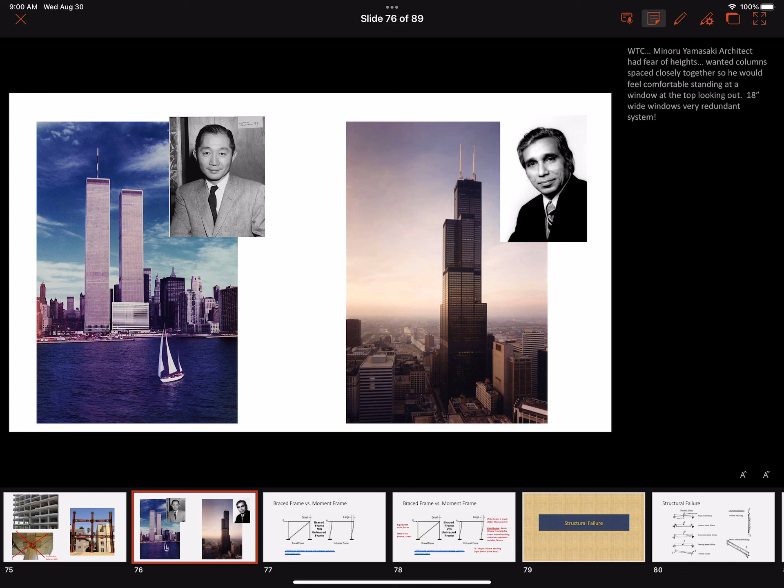Last time we left off with the different types of lateral force resisting systems. Can anyone remember what those three types are? Braced frame, yes. Shear wall, yes. Moment resisting frame, excellent. Almost every semester I've taught this class, that has been a question on the first exam: what are the three types of lateral force resisting systems? We got braced frame, shear wall, and moment resisting frames.

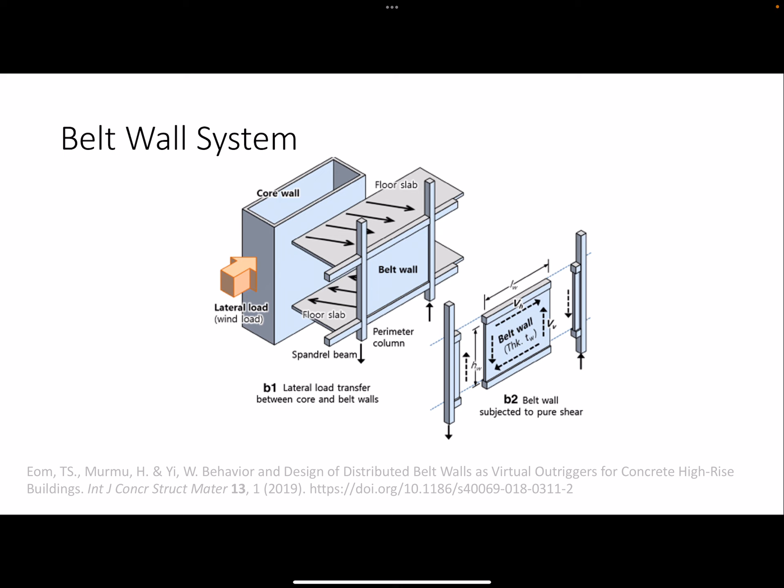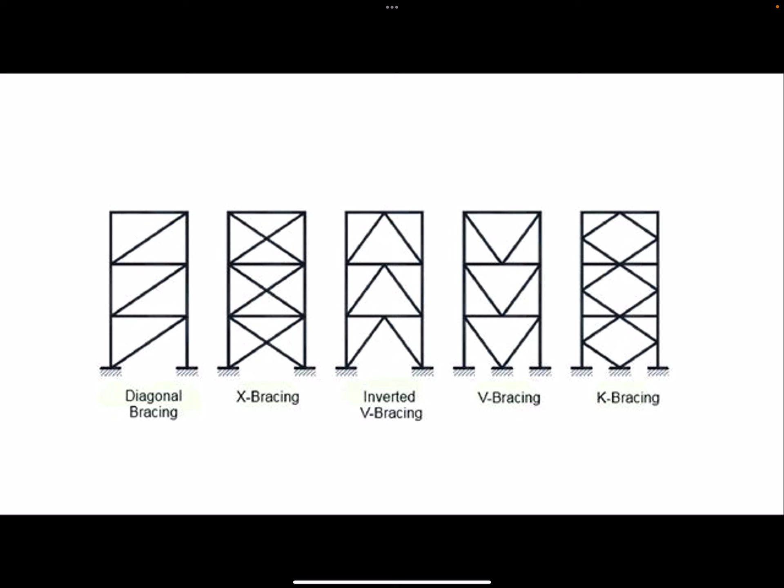So just as a quick recap, going through here: shear walls have the solid panel, right? Braced frames, you can have one or two diagonals there, different configurations for a braced frame. Shear walls have solid panels. They can be made of any material that can resist shear, right?

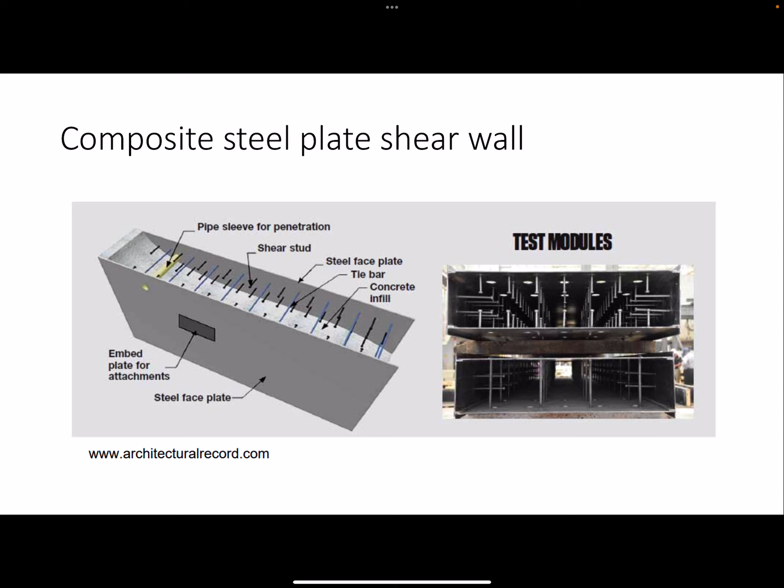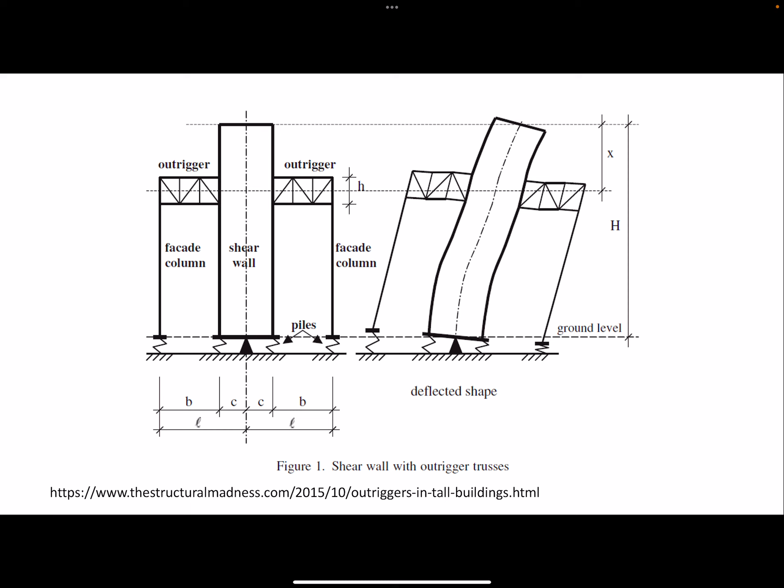In high rises, sometimes you need to include outriggers with that shear wall. That doesn't make it a different lateral system from those three types. It's still a type of shear wall system, all right? But that just makes it possible for a high-rise structure.

And then for moment-resisting frames, there are a few different configurations that you can have, but usually they involve this type of rigid joint. We'll talk more about that later on. We looked at pinned joint behavior as well. So that's another important concept: what is the difference between a rigid joint and a pinned joint? How do they behave differently? What are the different assumptions associated with those joint connections?

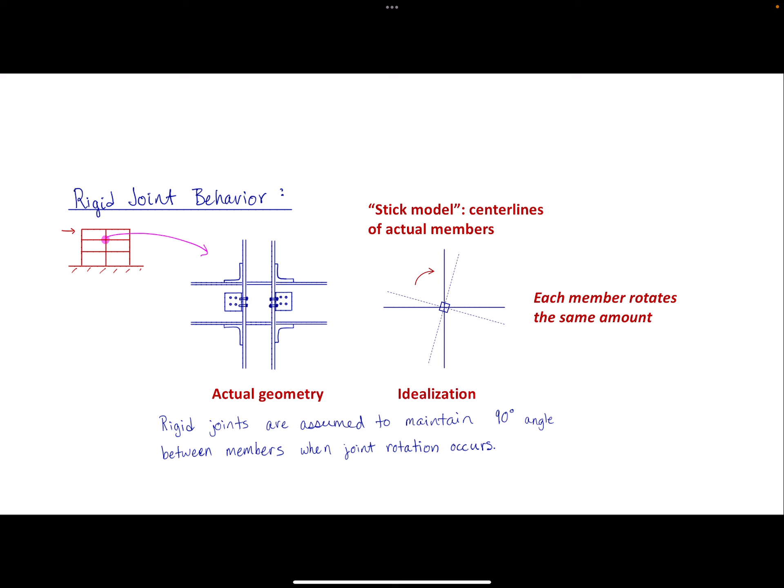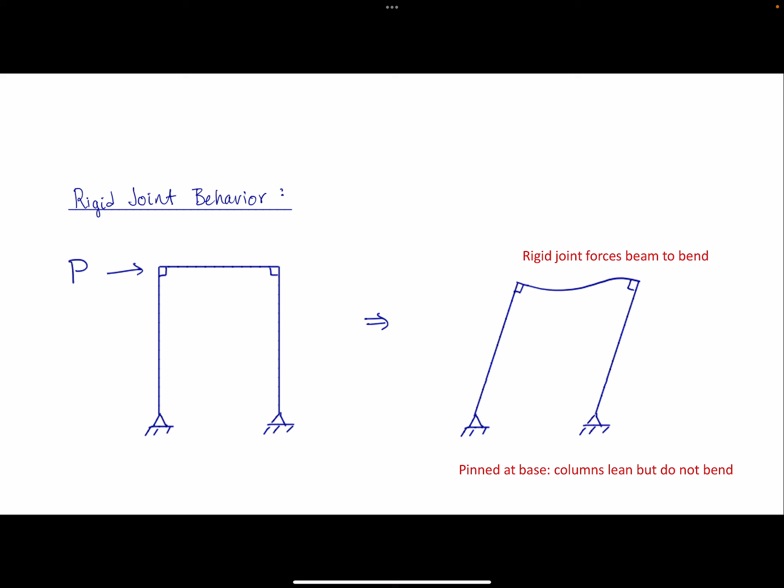Remember with a rigid joint, you maintain a 90-degree angle between beams and columns. So when that joint rotates, every beam and every column that frames into it has to rotate by the same amount and in the same direction. If you have a pinned joint, then the beam can rotate separately from the column, or you don't have to maintain that 90-degree angle.

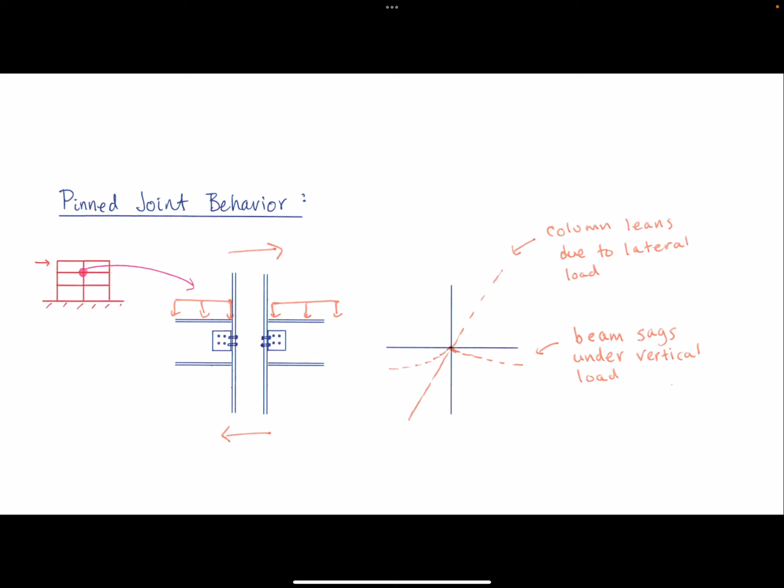The World Trade Center towers consist of very closely spaced beams and columns. The spandrel beams are pretty deep. The columns are very closely spaced together, just about 2 feet apart roughly. The reason for that is because the architect, Minoru Yamasaki, who is an American of Japanese descent, was actually afraid of heights. So he wanted anyone to be able to feel comfortable standing at the perimeter of the building towards the top, looking down out the window. And in order to do that, that's why the columns were so closely spaced together.

And that happens to also be one of the reasons the buildings were able to stand for as long as they did after they were impacted by those airplanes, because that made for a pretty redundant outside system. So this is a tube system that consisted of interior column and core around the elevator shaft, and then all those perimeter columns resist that lateral load through moment frame behavior, which is a lot of shear and flexure.

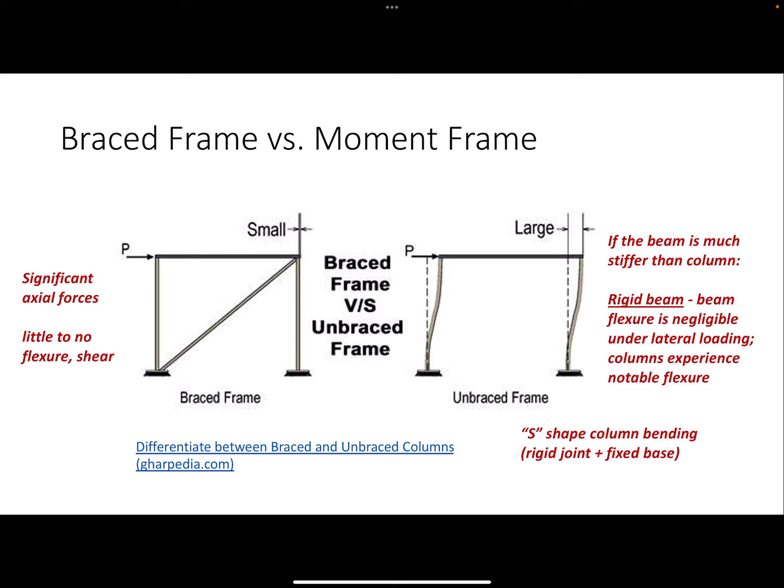All right, so now to wrap up this set of lecture notes, before we roll into the gravity load path discussion, we'll look at some potential structural failures.

Horizontal shear failure occurs, this is mainly a concern for components or beams that are assembled in layers. For example, glue laminated wood beams are often constructed in layers, and so if that bond between the layers, the glue, isn't strong enough to resist the horizontal shear in that beam, then it will fail and those layers can just slip and slide right past each other. So we want to avoid that, of course.

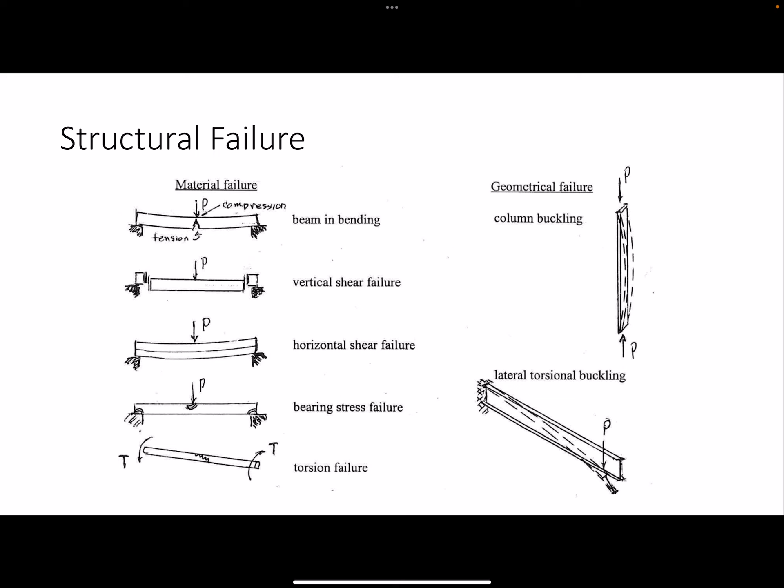So then on the right side we have geometric failure, different types. First you've got column buckling, which is a concern anytime you have a column in compression, especially if it's a slender column. And you have lateral torsional buckling, which is an issue with beams that span long lengths, particularly if it's a cantilever beam as shown here. It represents a kind of twisting and bending out of plane. To avoid those failures, a simple fix is to provide lateral bracing at midpoints or endpoints wherever it's crucial.

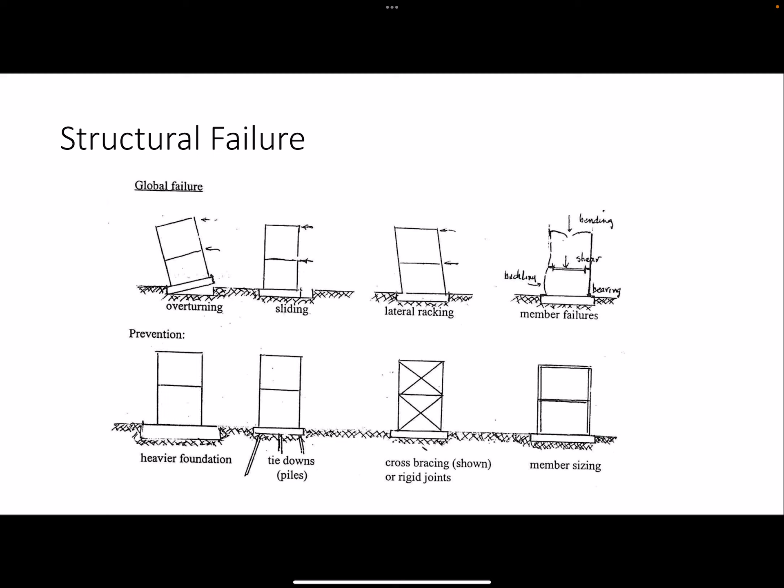And even with rigid joints, you'll still have some racking there, so that's just something to keep in mind. But the more you stiffen up those joints, the less that racking will occur. And then lastly, you have all those different types of member failures that we talked about on the previous slide. The solution to that is to really make sure your members are sized appropriately.

All right, questions?

If you have a lot of lateral racking, why wouldn't you just make it a braced frame? A lot of times that comes down to what the architect and the client want aesthetically, honestly. Because if they want a certain look, then braced frames don't fit it.

And we can make moment frames work—we have ways to deal with it. But it is just a different expectation that we have for the building. Good question. Any others? All right, so now, just for fun...

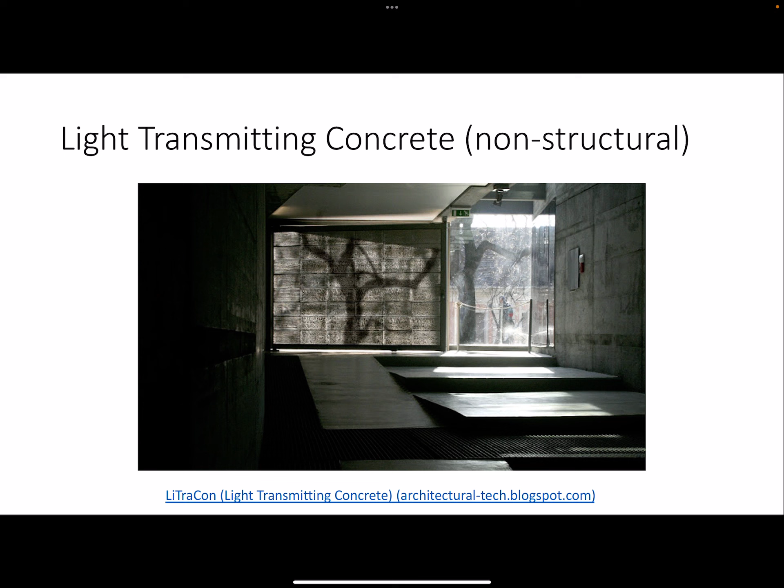But this is actually a pretty cool product. It's called light transmitting concrete. It is purely non-structural, so it's just for good looks or interesting architecture, and it can be used in non-structural purposes. So, all right.

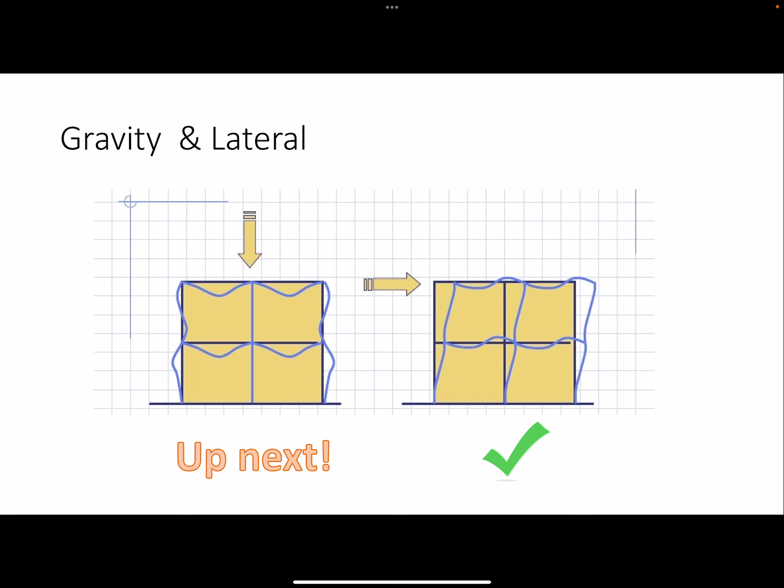So now I'm going to jump over to the gravity load path discussion. We just talked about lateral systems and lateral loads. Now we're going to talk about gravity loads.

Could also just be a flat plate. You don't necessarily need a whole network of beams. You might just need beams on the perimeter. It depends on the system. Whatever you have at that level transfers those forces to the vertical elements, being the columns and or walls, and then those transfer to the foundation.

So the floor system, when we say that, we're referring to whatever structural flat plate we may have, and then any beams that are in play. That also includes knowing where the support points are, which would of course be columns and walls, or maybe other beams, depending on what we're looking at.

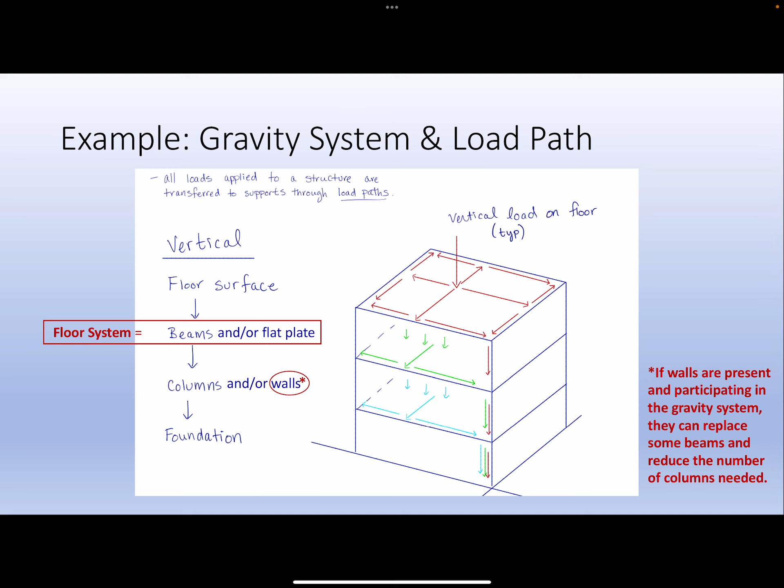Now, looking at those vertical elements, this note points out that if there are walls present in the gravity system and they're participating in that system, they can replace some beams and reduce the number of columns that are needed. So it just depends on how you want to use them, or if you want them at all.

All right, so now we're going to look at a couple different types of floor systems and go through some vocab. These floor systems are also included in the skeleton notes handout designated for Friday. We may touch on that a little today, but I'm not going to do much, if any, writing that goes on that. They are repeated on that set of lecture notes for your reference, so you can draw more on them if you want.

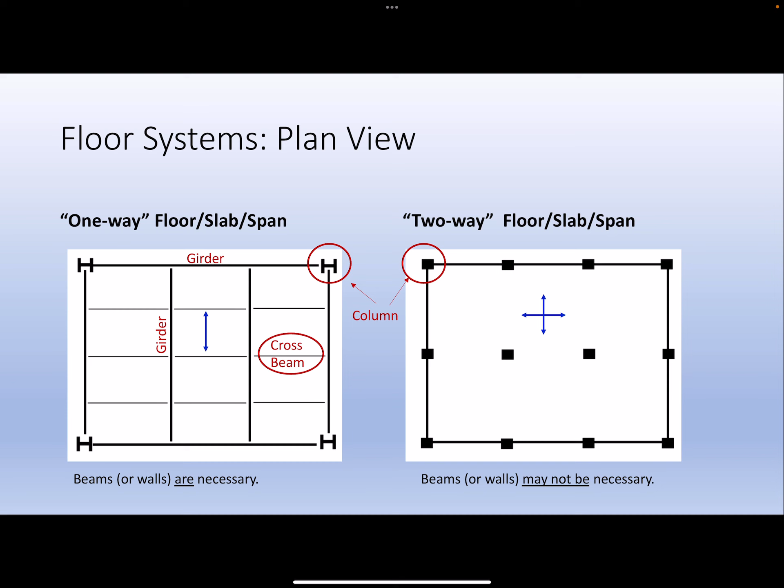So we're going to go into the definition of different beam terms. Girders are specifically beams that support other beams, right? We've got the same floor plan with different terminology highlighted. A primary beam is a beam that spans between columns. So the definition of girder is tied to what the girder supports. The definition of primary is tied to how that beam is supported.

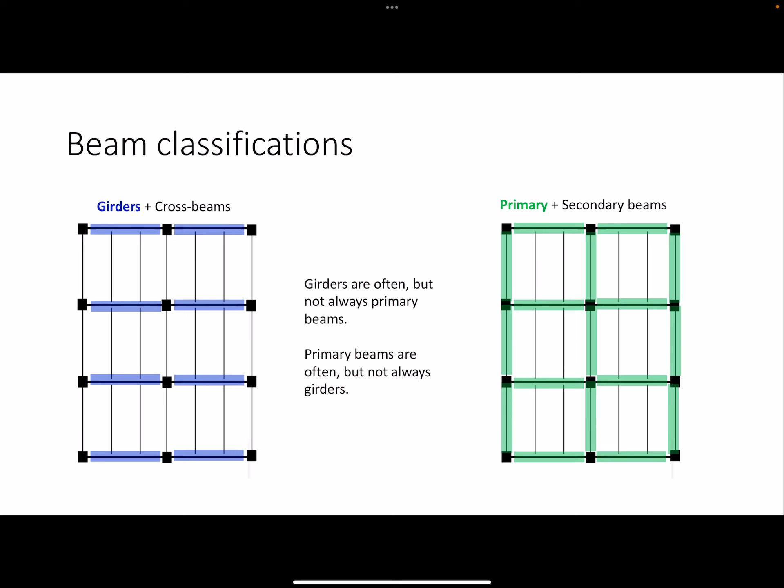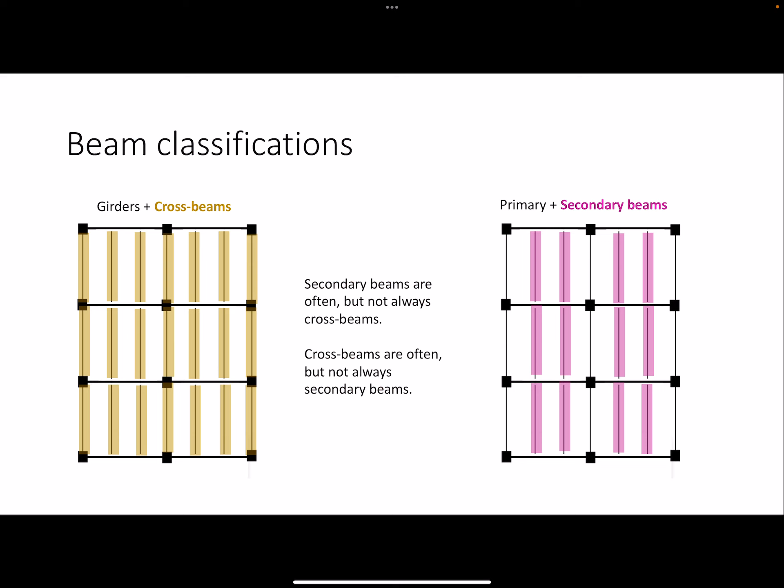So it can get a little confusing, but we use all of these terms sometimes individually, sometimes together. Cross beams would be beams that could be supported by columns or girders, but they're generally referring to beams that directly support the floor surface or slab. And then secondary beams are specifically beams that are supported by primary beams, supported by other beams.

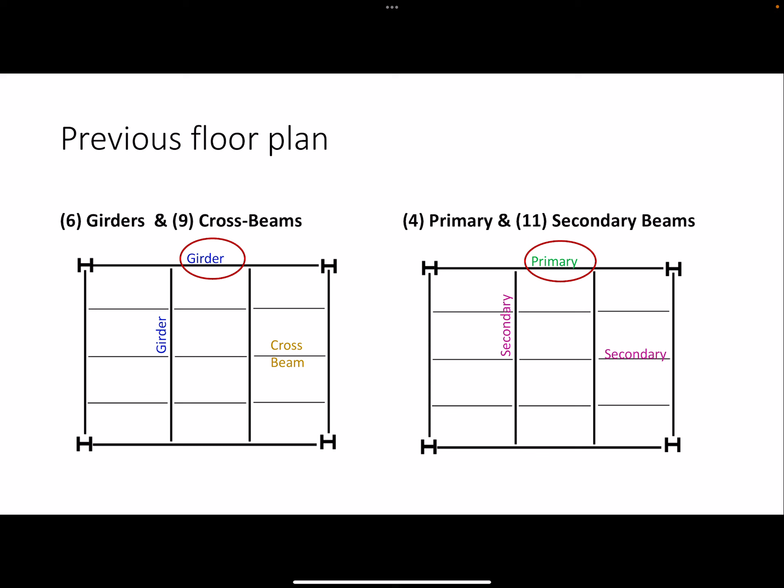So in a different floor layout, we can see how this girder would also be considered a secondary beam. This girder would be considered a primary beam, because here these beams are supported by columns, but this is a beam that is supporting other beams. So we might call this a primary girder and this a secondary girder, with the cross beams and secondary beams shown there. All right, primary girder, secondary girder. Questions about that?

There is a glossary on D2L under course resources, I believe, that should have those terms in them in case you want to go back and refer to it.

All right, so now we're going to introduce the concept of tributary area. Here's the note on the glossary items, so you can find this definition there as well. It says basically you have to consider the element that you want to know the tributary area for. Every individual component has a tributary area. A column has a tributary area. Every beam has its own tributary area.

And it's defined as boundaries that are drawn halfway from the element that you're considering to the next supporting element of the same type, or at the same level within the load path.

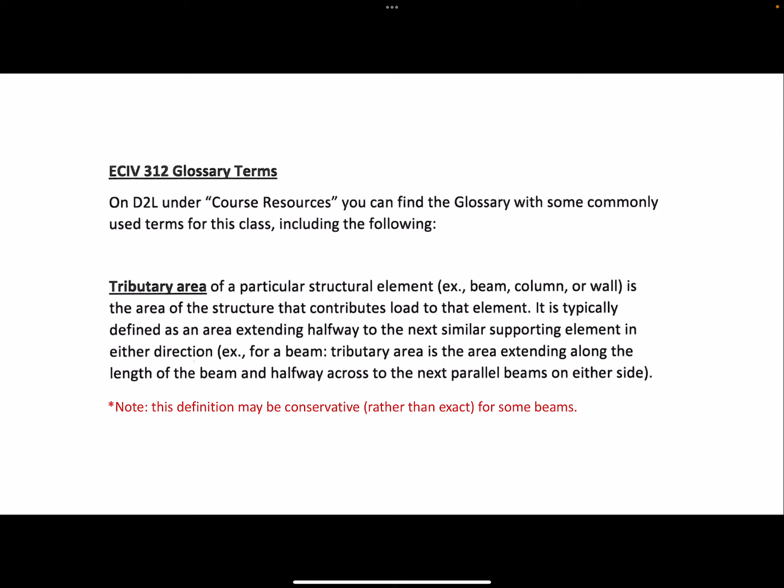Halfway to the next one in any given direction. Most times it's pretty straightforward, but sometimes it can get a little bit tricky.

But here, if you have a pretty regular layout like this, here's an example of column tributary areas. The interior columns tend to have the greatest tributary area, while corner columns tend to have the smallest tributary area.

If you have a shape like this, you can see the different tributary areas of those columns, noted by the squares or circles at the perimeter. They just get shaped differently, so you might need to use a CAD program to calculate what those are versus doing it by hand.

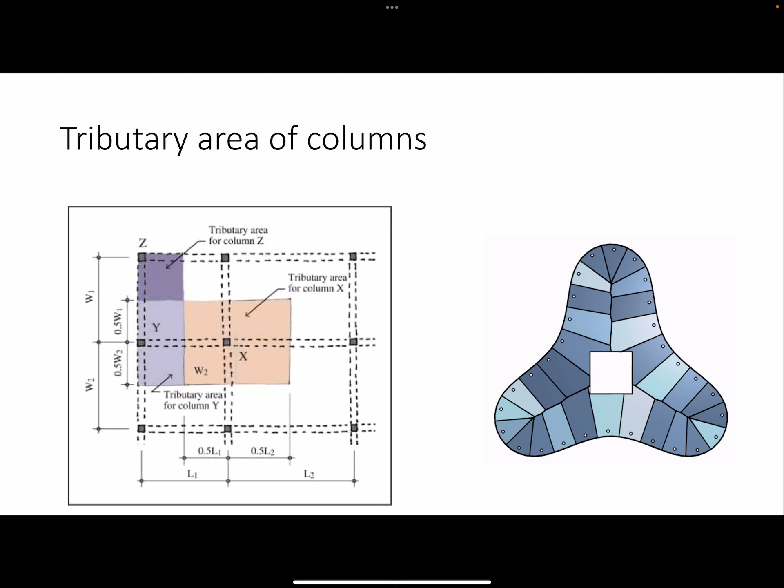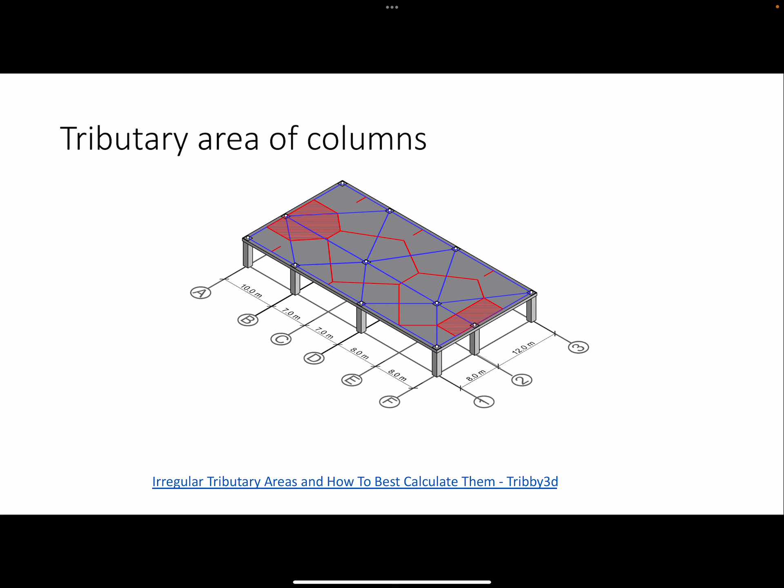If you have an irregular column layout like this, the tributary areas can get pretty complicated. That's not always avoidable—sometimes you're going to have irregular layouts and awkward tributary areas to calculate, but in general it shouldn't be too out of hand. Here you can see different tributary areas highlighted for columns in this floor layout, but this is pretty extreme, I would say.

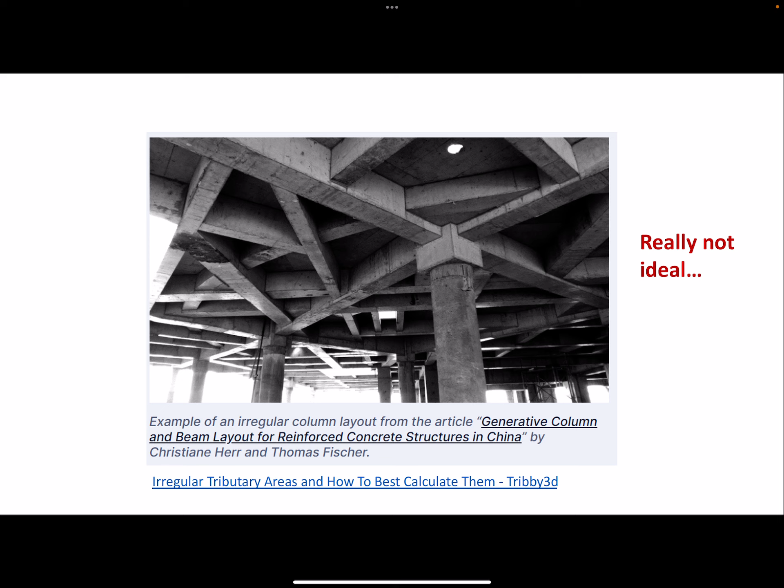That is something I would definitely want to avoid as a structural engineer. This is all reinforced concrete—look at all that stuff going on there. I can't even imagine the headache it was to construct the formwork and figure all that out. I hope that if any of you end up designing structures, nobody does anything like this.

Questions so far? That's all from a bird's eye view, right? Yeah, these are all plan views that we're looking at. Any other questions? Okay.

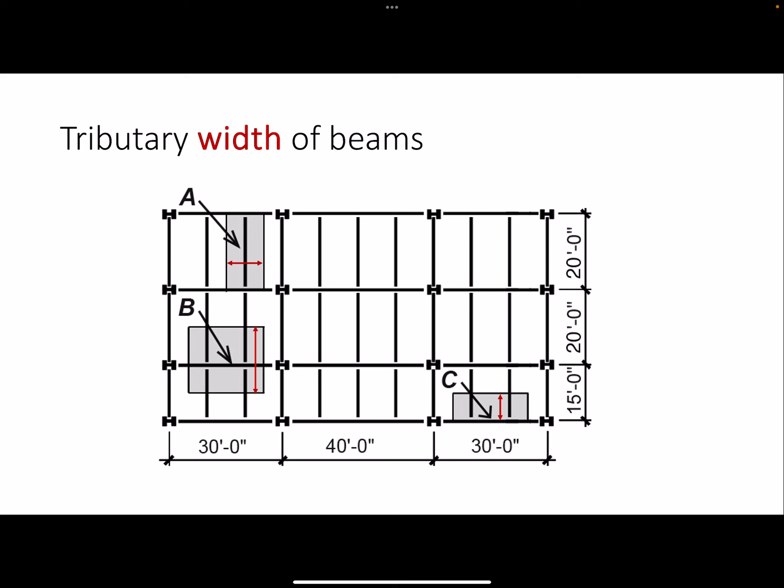So what do we use these for? A number of different things. Initially, we're just going to be concerned with using tributary areas and width for calculating loads through the load path. Tributary area would be used to condense a surface load in pounds per square foot to a point load—for example, if we want to know how much a specific column is supporting. What is the point load on that column from the surface load on the floor? We would use tributary area to calculate that.

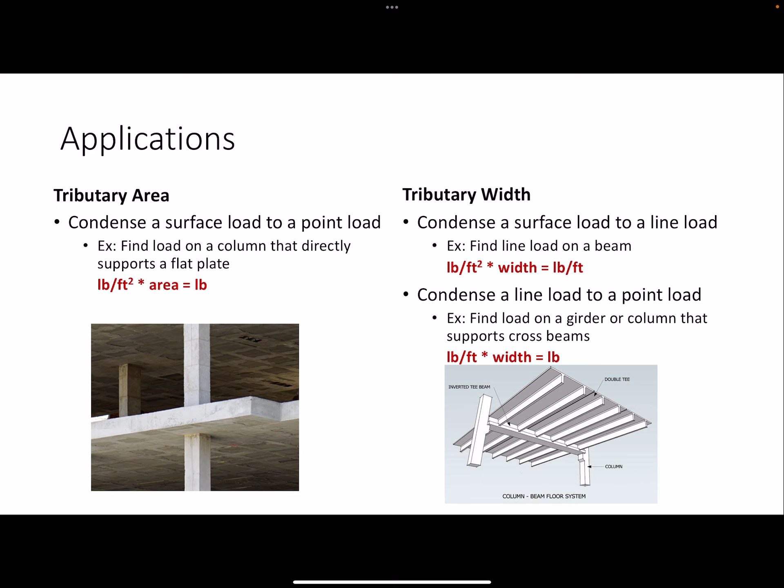Similarly, we would use tributary width to condense a surface load to a line load on a beam. We take that PSF load times the width, that one dimension of the tributary area of the beam, to get a line load in pounds per foot. Or we would condense a line load on a beam to a point load, maybe where it frames into a girder. If we're looking at a girder, we want to know what the point loads are at the locations where the cross beams frame into them—we would use the tributary width of those cross beams to calculate that load.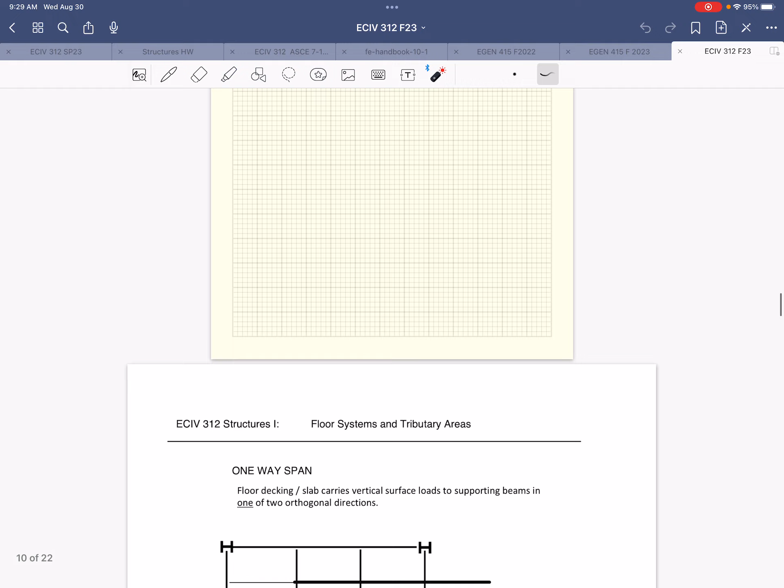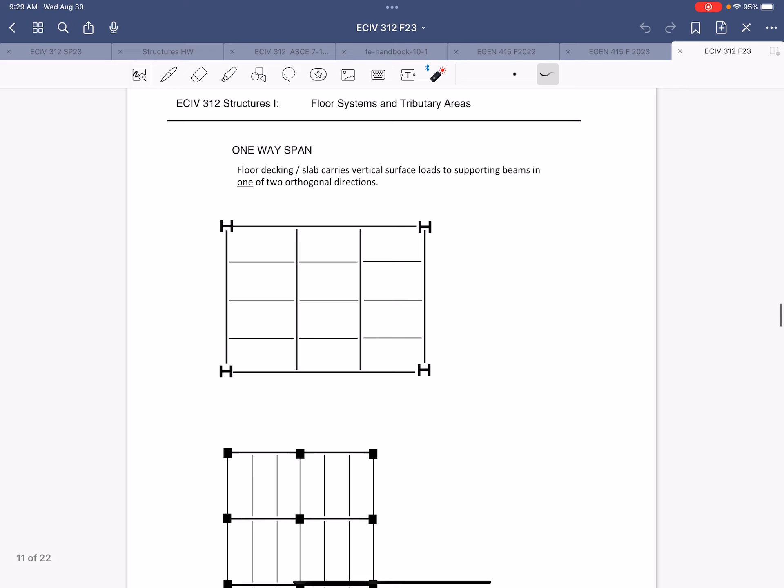So here again is that page where we have the one-way span floor layouts shown—there's two different ones shown here—and then the two-way span is on the next page.

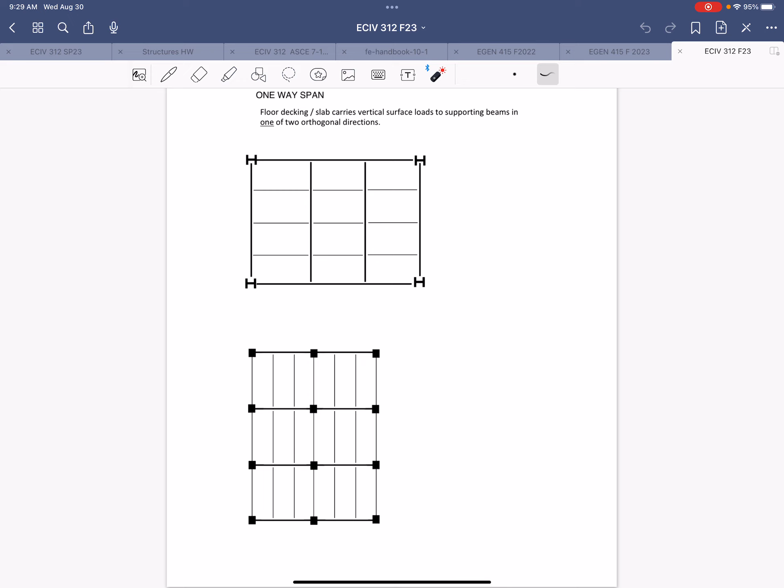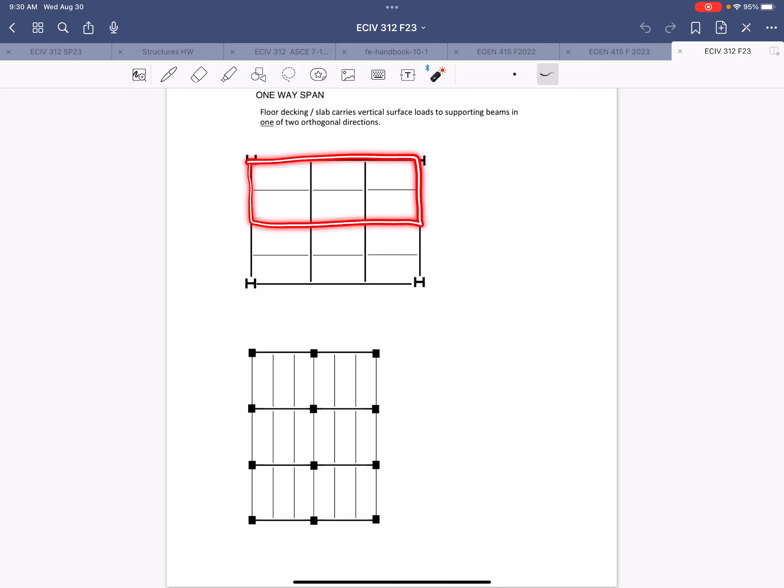So we can look at this and imagine what the tributary areas are. If we have this girder, its tributary area would just be essentially half of the floor slab, because we take half that distance to the next girder. These girders would be on the level above within the floor plane, the floor layout, so each would have tributary areas.

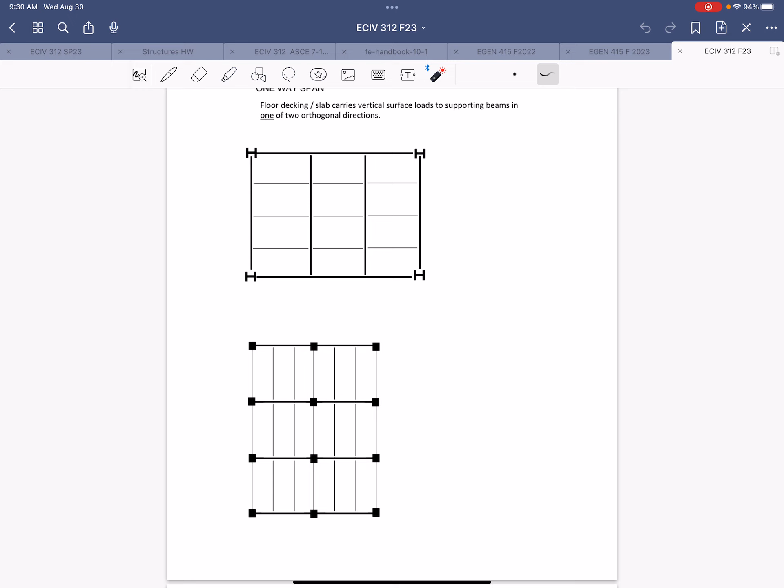These areas are outlined by lines roughly halfway between those four beams. And then each column in this floor layout would support a quarter of the floor, so that one's pretty straightforward as far as the columns go.

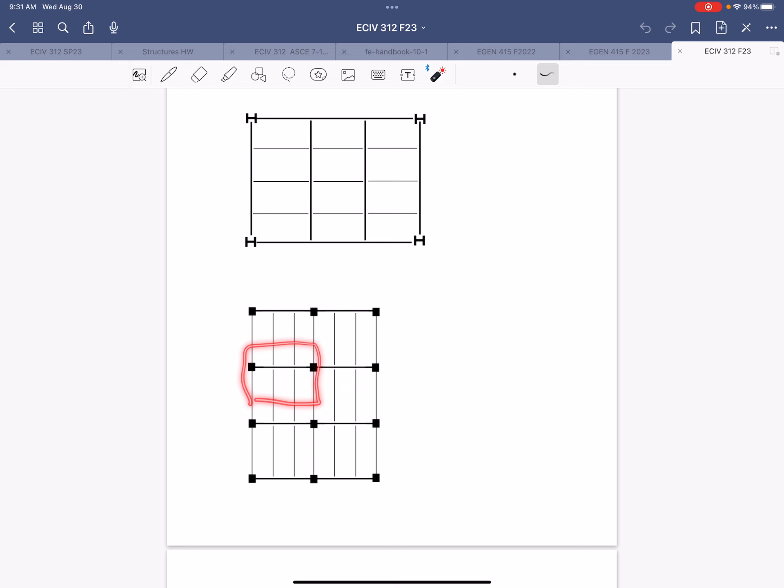Over here we have a slightly different scenario. We don't have any secondary girders—all of our girders are primary beams because they're all supported by columns. So each of those girders would have tributary areas defined by lines halfway to the next adjacent girder, and similar for the cross beams, whose tributary areas would look like that.

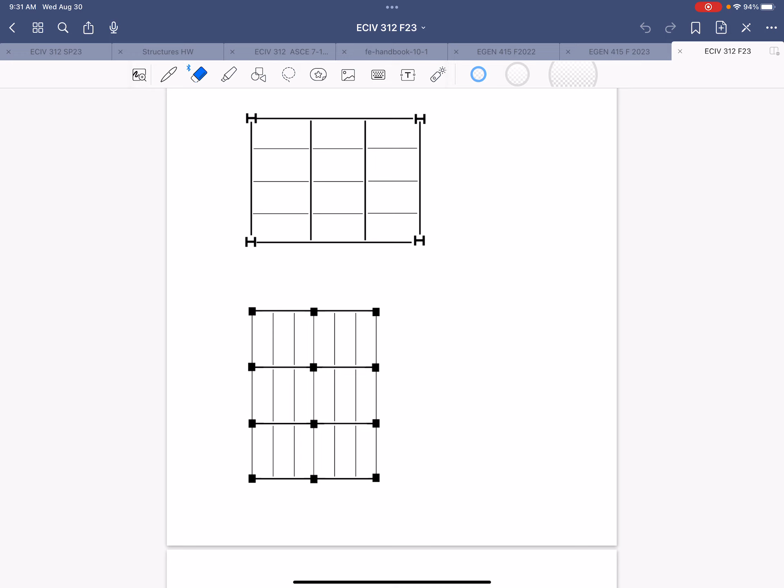It's normal for tributary areas to overlap among elements that are not in the same level of the load path. The level of the load path would essentially be the floor to the cross beam to the girder to the column—so the cross beams would all be on one level, the girders on the next level, and the columns on the last level.

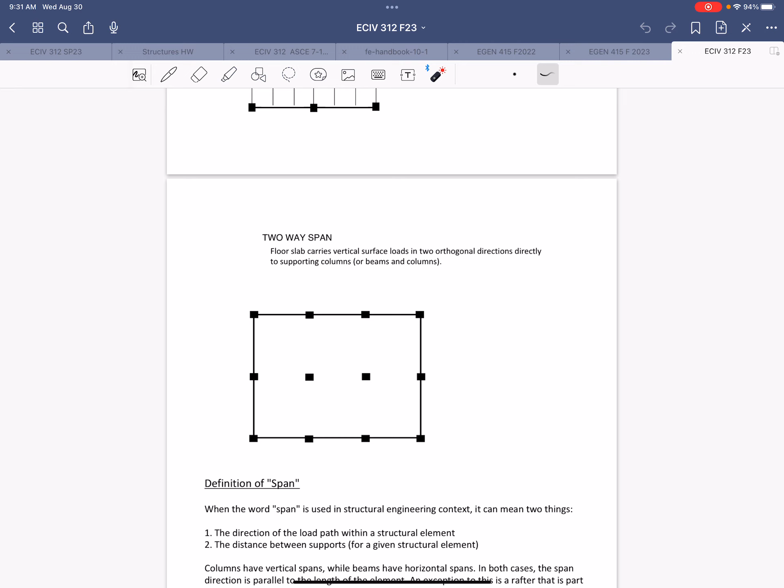And then for the two-way span, we just have that slab transferring load in both orthogonal directions. You probably would have some kind of beam at the perimeter there.

And then here we have definition of span. In a structural engineering context, span could mean two different things. It can be used to communicate a distance—the distance between supports for a given structural element. This distance is typically either vertical or horizontal depending on the element: beams typically have horizontal spans, columns typically have vertical spans.

An exception here is noted below: a rafter that's part of a sloped roof. In that case, the span is still horizontal, not along the length of the member. The exception speaks to the second part of the sentence before—in both cases, the span direction is parallel to the length of the element, with the exception of that sloped rafter.

The other use of the word span is shown here—it can be used to communicate the direction of the load path within an element. You'll hear me say that a lot in this class, referring to span in both contexts.

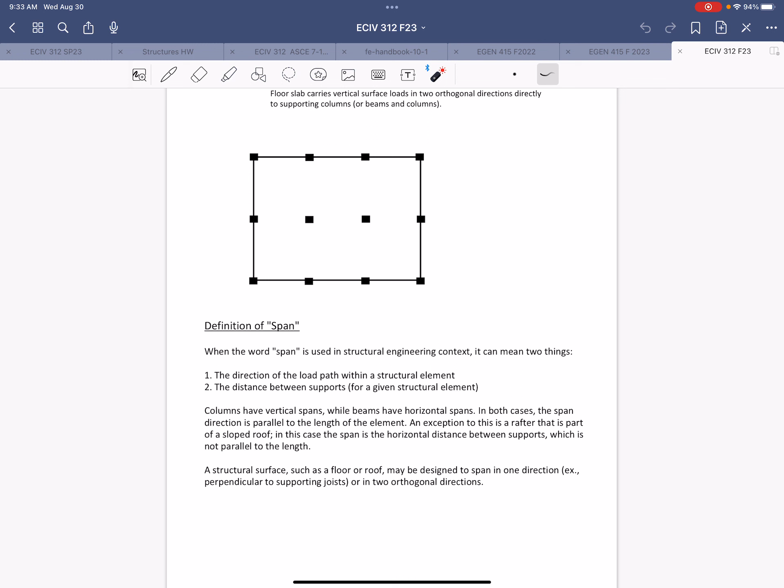On the next page we've got a few examples of actual one-way and two-way slabs. At the top, whenever you see corrugated metal decking, that's always a one-way floor system—it may or may not have concrete on top. In this example it does, so you can see the reinforced concrete, reinforced in two directions, but the span is still going to be in the direction of the metal decking, parallel to the flutes.

This is similar to taking a piece of paper and folding it like that. In this direction it's really floppy, but in the other direction it's pretty strong. I've even used it to support my cell phone in this direction. So pretty strong in this direction, but if I try to do that in the other direction—which will be a little tricky for me—that's not going to work.

So you can intuitively understand why it's just a one-way span. You can always tell looking below what direction that floor is spanning, because you see the direction of the metal deck. Then you can identify, okay, this is a cross beam, this is a girder—usually it's also easy to tell because girders tend to be a lot deeper than cross beams, though not always, sometimes they're similar in depth.

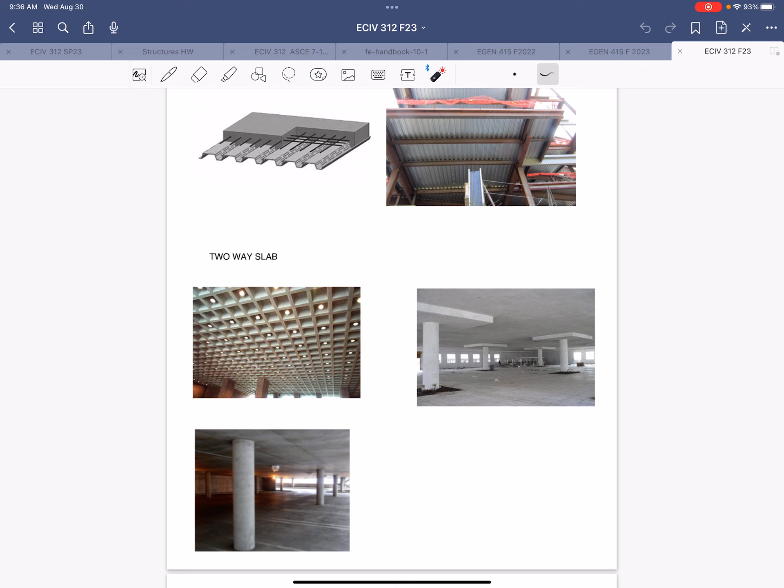This one is not really used anymore for new construction, but you might see it in older buildings. It's called a waffle slab, and the formwork essentially looks like a waffle iron. The concrete is poured, and you've got a network of grids of beams built underneath and integrated into the slab. That was a pretty popular way to construct these long span two-way concrete slabs.

But since then, we've come up with more efficient ways to do it. Over here, you see a flat slab with what we call drop panels. So that's a drop panel. That is purposely to thicken the slab at the locations where the columns will support it, to avoid that column punching through the slab, which we call punching shear failure. We want to avoid that at all costs.

Or you could have just a flat slab without those drop panels, which might require a thicker slab overall. In this scenario with the drop panel, you can achieve a thinner slab in most of the area, and just thicken it at the locations of the columns.

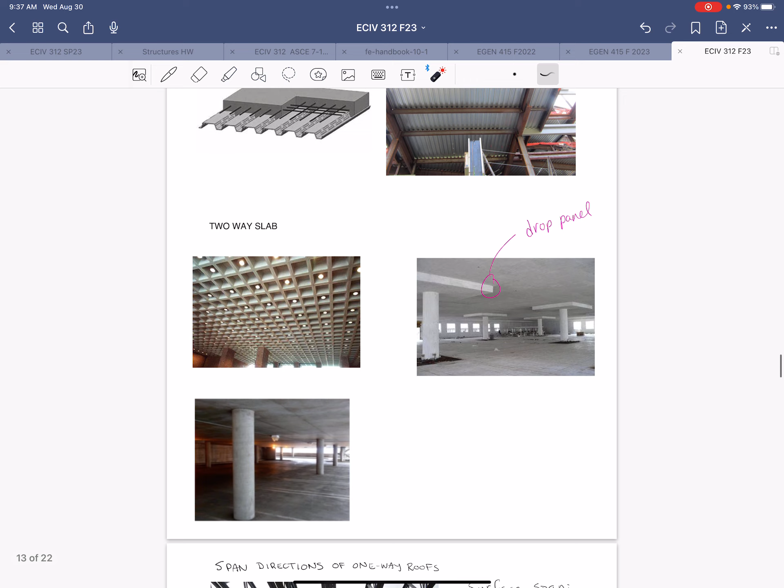Now we've got some one-way roofs shown here. The first two are just showing the joists that would support the roof. The roof surface isn't yet in place, but just by looking at where the joists are placed, you can tell how the surface will span - it'll span perpendicular to the length of those joists.

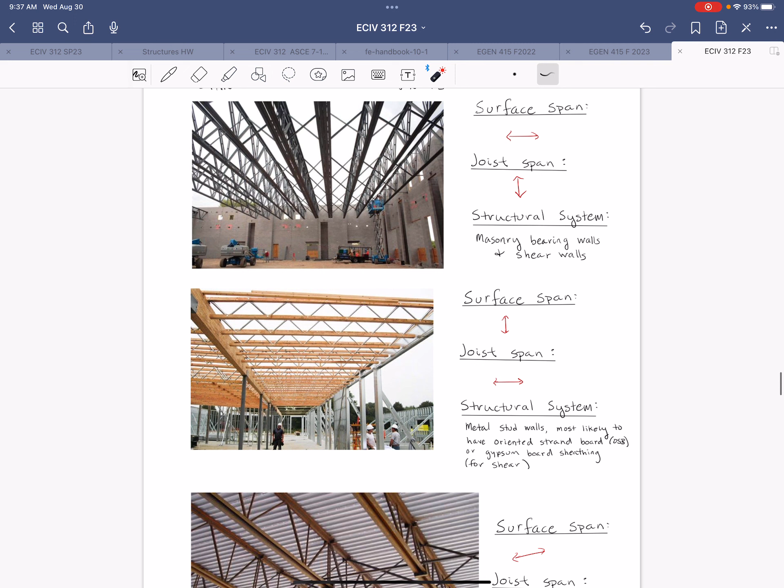In this scenario, these joists are supported by masonry bearing walls and shear walls. It might be a little hard to tell in the image, but those are masonry walls, not concrete walls. And then down here, you have a similar scenario.

These are composite joists, wood and probably aluminum, maybe steel in there, supported by metal stud walls. They'll most likely have OSB plywood sheathing that would serve as shear walls for that system. Or they could have gypsum in there - that's another common application. But that's what I would predict for that system.

And then, of course, here the roof surface is in place, so you can see the direction of those spans.

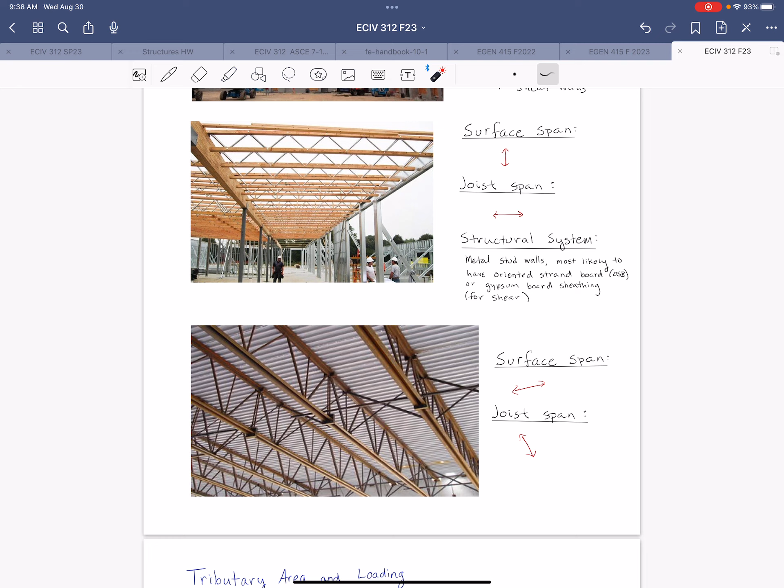All right, questions? No questions? Okay.

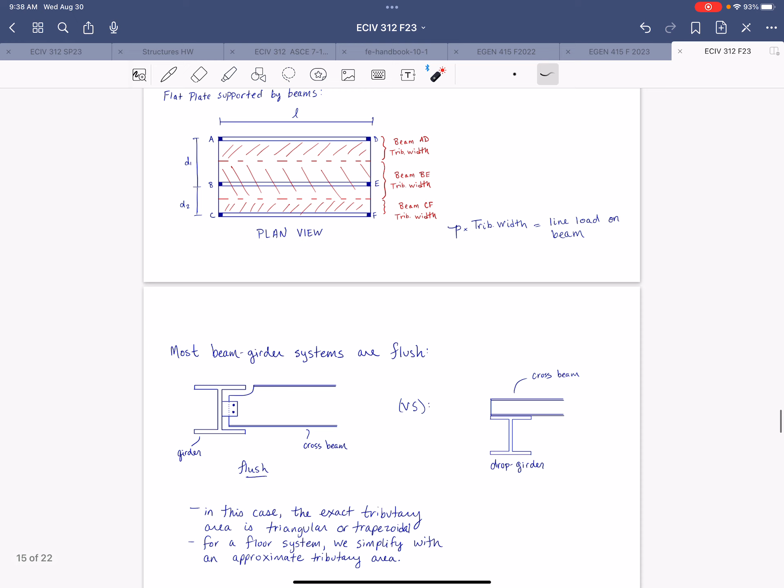Well, I'm going to stop here with the lecture notes, because then we'll just dive into some writing calculations and examples on Friday. But since we do have a little bit of extra time, I just want to check again.

Anybody have questions on the homework? How are you liking drawing deflected shapes? I haven't started yet. Okay, all right. I appreciate the honesty.

My hope is that you'll start to develop an appreciation and maybe even an enjoyment of drawing deflected shapes of structures, because it's something I'm going to ask you to do, though not necessarily part of every single problem you're assigned. But I'm going to challenge you, before you dive into analysis of any structure in this class, just imagine how it would respond. Try to imagine that deflected shape, and draw it if you want to. Unless you're specifically asked to draw it in the homework assignment, it won't be required. But that's a really good way to start developing your intuition, thinking about how that structure will behave and respond, taking the supports into consideration. It's really going to strengthen your understanding of structural behavior. So that's why I build it into the very first homework assignment, and then I try to encourage you to continue that practice on your own.